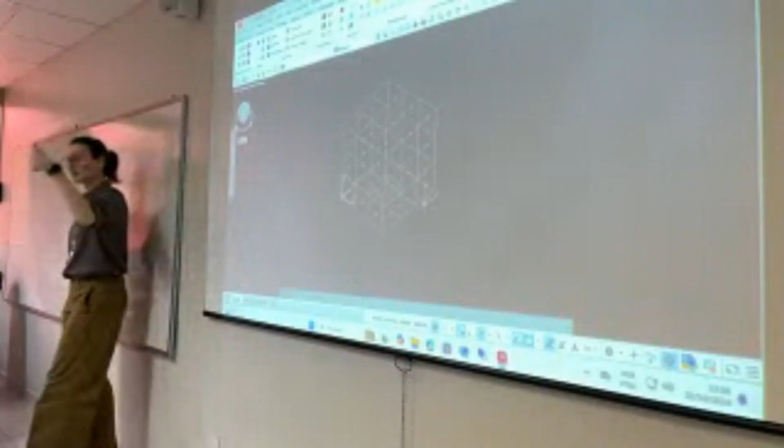Everybody ready? Okay. So we're going to be starting now the workshop or tutorial about thermal analysis with Thermal Desktop from ANSYS today, okay?

Just to present myself real quick, my name is Talita. I'm a professor at Federal University of Santa Catarina, in Santa Catarina, a little far from here. And I work in this area of thermal analysis for different applications, oil and gas, petroleum, and industrial equipment, and

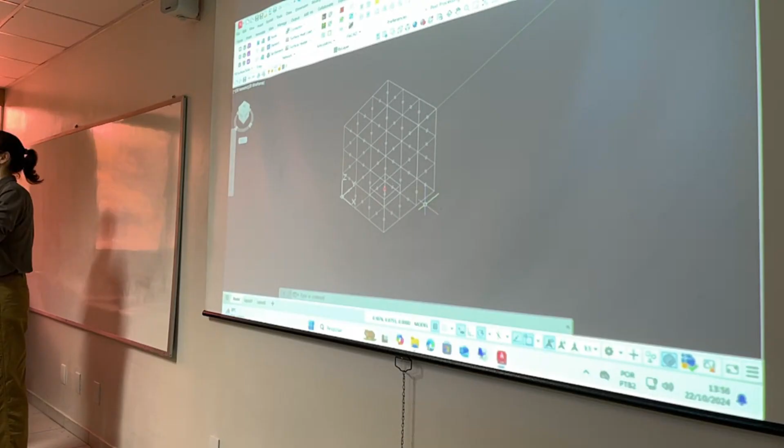satellites. So today, I'm going to be presenting a little how the Thermal Desktop software works for space applications, okay? That's the idea. Please feel free to ask questions at any time, okay? This is the interface of Thermal Desktop. I'm just gonna be showing you a little what we are going to be looking at at the end of this tutorial, and then we are going to be starting from the beginning, okay?

This software, I don't know if you are aware, Thermal Desktop is the software that nowadays ESA and NASA use, okay? As far as I'm aware, it's one of the most used softwares for space applications. So it's a very good software. In Brazil now, they have a commercial representative. In Portuguese, we say E3S. In English, it would be ESSS, the seller of the software.

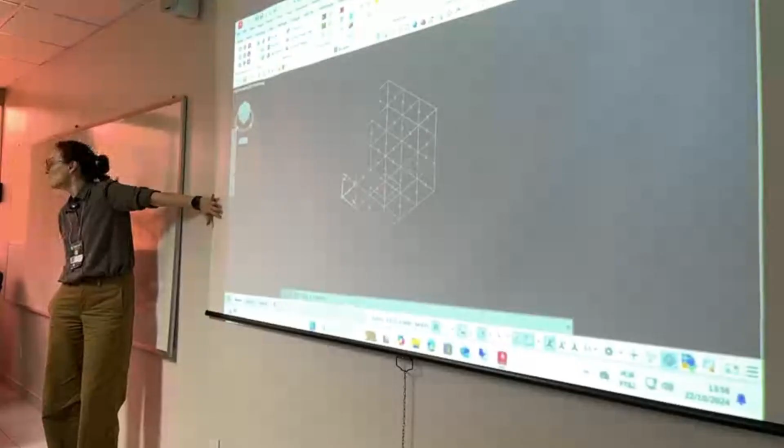They sell also all models from ANSYS, okay, CFD, mechanical, all these models. STK for orbital analysis, they are the seller, okay? And now they sell this one. We have bought this Thermal Desktop license for our lab in Santa Catarina. Nowadays, my students are learning to use it, and I actually like it very much. That's why I decided to have a little tutorial about it.

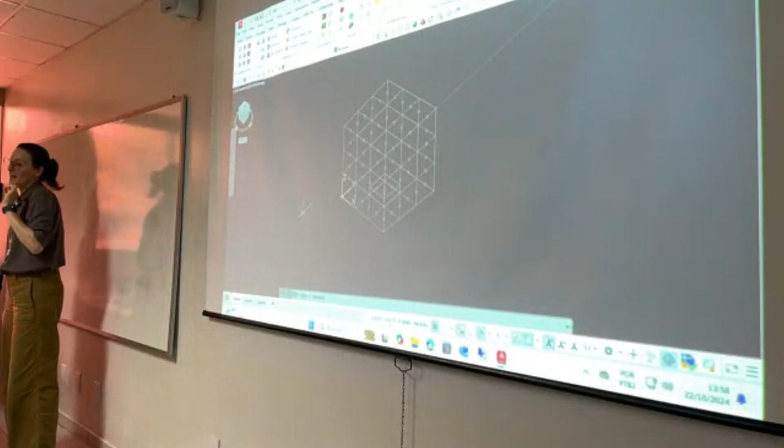It's very good, but it's a little complicated. It's not as user-friendly as ANSYS usually. Okay, that's the idea. So what I have here, just to have an idea, it's a very simple example. Since we only have 1 hour and a half, we're gonna be applying it to a simple 1U CubeSat in orbit. It's one of the most basic applications, okay?

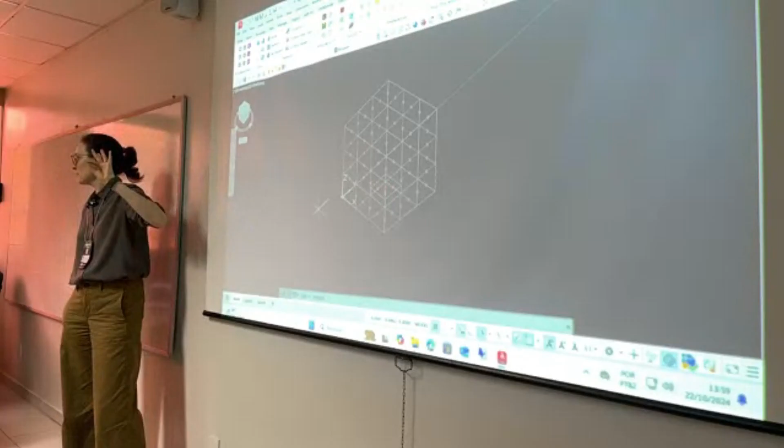You can do a lot more. They use it for the International Space Station, okay? You can do a lot of things, but this is a basic example that covers all the basics you need to know to make it work. So what you can see here, it's a 1U CubeSat, 10 centimeters by 10 centimeters by 10 centimeters, something like this, okay?

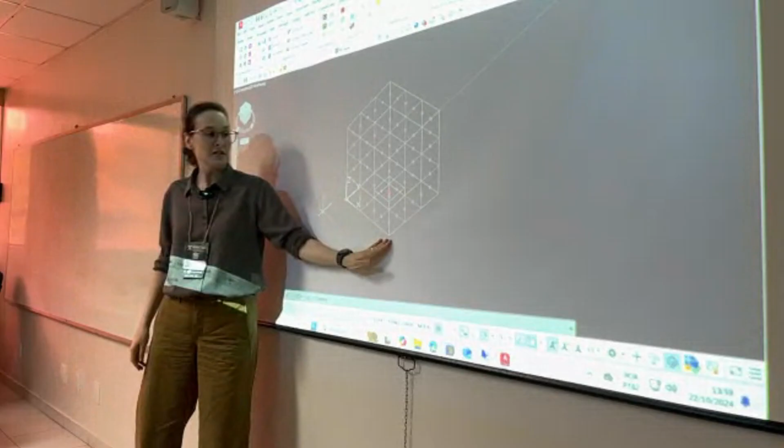Very simple. It has a little battery inside. You can see here a little cube. Let me change the wireframe. Here we are seeing the wireframe. Here is the 3D model. And just so you can see inside, let me just... sorry.

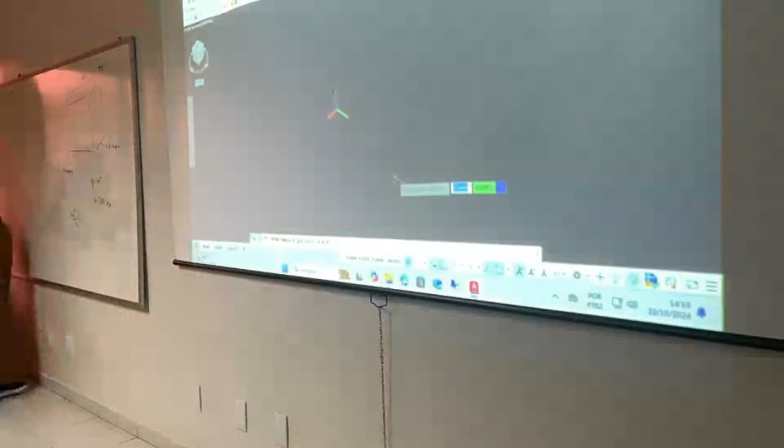So the thermal model, you can see what you can actually do. I'm going to do a little rectangle. You can see AutoCAD works with coordinates. So if you are more than 40 years old, you know how to do this. But if you are younger, you are more familiar with SolidWorks. That's a little different. But here you can see the coordinates. So you actually put 0, 0, 0, 0, 1, something. You can do it like that. But they do have something for newer generations where you can click for the origin. So I'm going to say the origin is 0, 0.

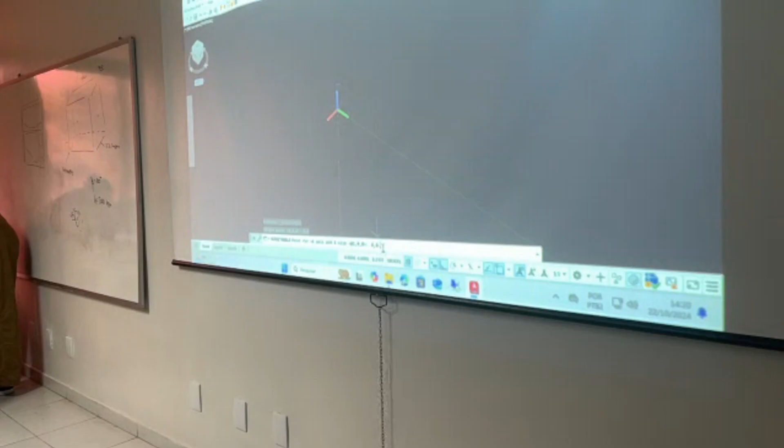Then it says, okay, your first point. If you put 0, 0 here, it understands you're going to be starting at 0, 0, 0. And then you can put points, each point, or just try to draw. I'm going to be doing the first point. So if I want a CubeSat 1U, it would be 0 for X and 0.1 for Y. So here it says, okay, you are telling me 0, 0.1, and 0 in X. And here you can draw. If I just click on the screen, it's going to close the rectangle for me. I'm going to close here.

And each time you draw something, he opens this panel for the surface. So here, he's saying to me, okay, you have a rectangle. In the X direction, you have one node. In the Y direction, you have one node, 1 per 1. This configuration here, one simple node. And you have X and Y. I'm going to be starting with this one because we can actually just update after, okay?

But if I put here 3 and 3, it's going to be 9 nodes, 3 per 3, and so on, okay? So this is 1 by 1. And now you have a lot of configurations here. Numbering. You do have to actually remember to use numbers for each node you create. So if you do not use different IDs, the software is not going to be doing it for you. Like I said, it's not a user-friendly software, okay?

You have to actually remember, I'm creating 3 nodes. I have to tell him which one is 1, which one is 2, which one is 3, okay? So this one for me is the 1, the first node. The submodel, you have to tell him, okay, what's the name? This is in what submodel. I'm going to be using only one model here because it's a submodel called solar panel. And then I would go here, say solar panel. I'm just going to be using one here.

But here I have my one face, the first one. You can see a little node because I said it's one node. Thermal Desktop is finite difference based, so it uses nodes for configurations, okay? Now I'm just gonna create the others.

Yes. You mentioned radiation for thermal. Does it include also conduction? Yes, it is there, but I didn't change it. Good question. If I double click, he's going to be opening the same tab for this surface, okay? You do have a tab for conduction configuration. I didn't change it yet because I didn't create the material. I'm going to be creating it, and then I go back here and say, okay, this is the material. But you're right, because what is finite difference?

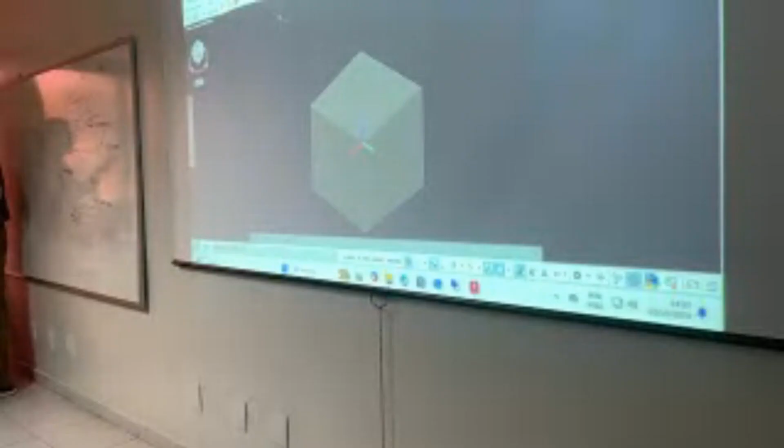Here you have the 6 faces, each one with one node. This is the geometry, only the geometry. Okay. Now, what I should do is tell the software which material this is. Is it aluminum, is it a solar panel, what is it? So you go to thermal, again, you see only the thermal tab. And I go to thermal physical properties, edit property.

If you do that, this panel is going to open, and we already have some materials because I already did this workshop, this tutorial at home to see if it was going to work. So you come here and you actually input your material. Which material do you want to work with? So if I want to do something like a test, just a test, you put the name, you do add, and it's going to ask you to give it the properties of the

materials. K is conductivity, for the conductance, okay? This is normal thermal conduction. Watts per meter per Kelvin. If you have iron, that's a metal, you're going to have a high conductance because it conducts heat through the iron. If you have something like insulation, it's going to have a small value, 0.1. So this is actually the value that you have in most handbooks for space applications for each material. Okay, this is very easy to find.

This is just the default, it's 1. Okay, we're going to be using the ones I have here. You can tell if it's isotropic or anisotropic, for guys from material engineering. If you have composite materials, you have anisotropy and so on. Usually in space applications it's isotropic. It's the same value in each direction. That's actually what we have.

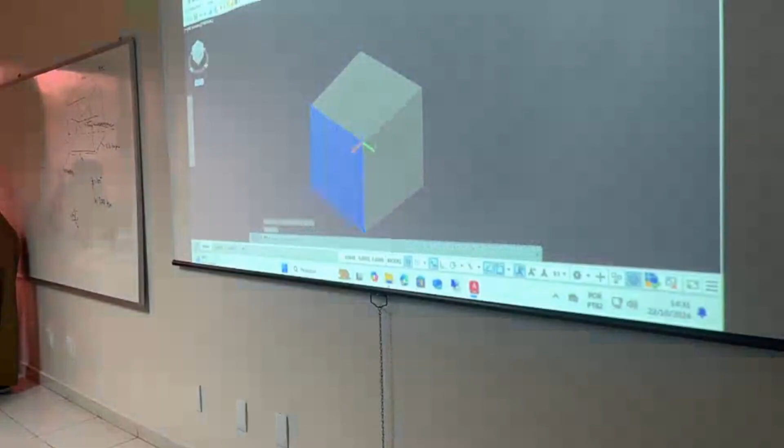And then I go back to my geometry and I say, okay, this surface is this material. Then I just do okay. Now it understands. I didn't use that. And here, okay. This is using a submodel that I created and called solar. You could use the same submodel. You can see here that I put this is aluminum. You can choose whatever. This surface is aluminum, okay? And I say the thickness is 0.02 meters. This surface is set. I can use different configurations. This is just an example.

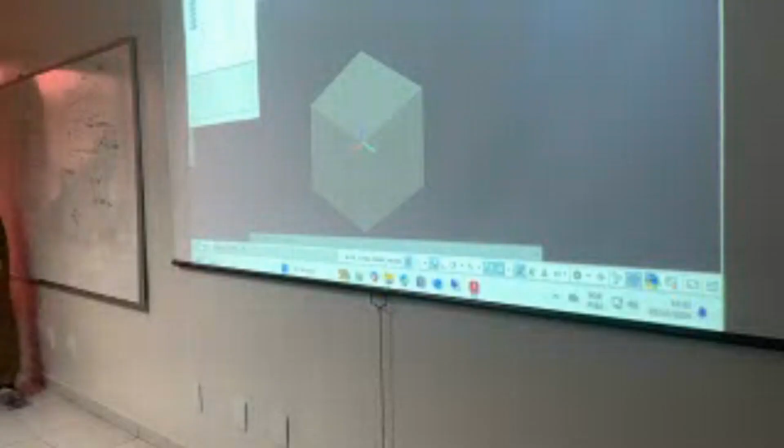So this is the conduction. You do that for every one. If you do not want to do one by one, you have this model tree. After you are familiar with the software, we use this model tree. It indicates everything that I've done. In the last example, the name was main. This I just called solar. You have 1, 2, 3, 4, 5, 6 nodes, one for each face. It's just a geometry tree. I can do everything from here also. If I want to change all nodes together, I just go here, edit, and it asks, are you changing the surface or the node?

I'm changing the surface. That panel that just opened is the surface panel. So I go here and I say, okay, change. Are you changing the 6 surfaces? Maybe the resolution is not so good, but there's a 6 here. Are you trying to edit all 6 surfaces all together?

Yes. If you go here, you're going to the same panel. But if I modify here, it's actually modifying all 6 configurations. When you are more familiar with the software, you usually do a lot of bundles like this. Okay. This is the conductance. So right now, the software understands that I have 6 surfaces and they are all aluminum. Okay.

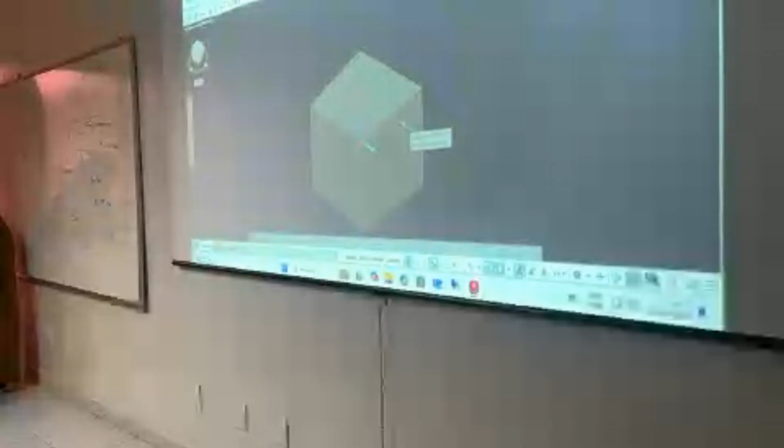The strong feature of this software is the radiation. So let's go for it, where if you don't know how to set it, it's going to lead to errors. So just to explain radiation. This is a very simple design. So we have radiation heat transfer, which, if you are not aware, is one of the three phenomena of heat transfer.

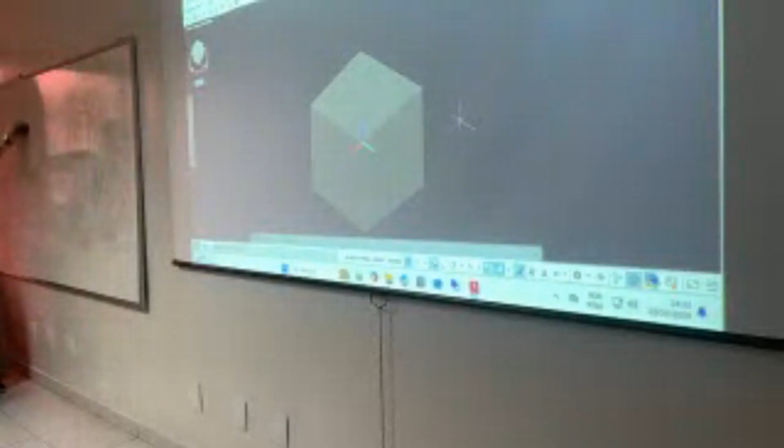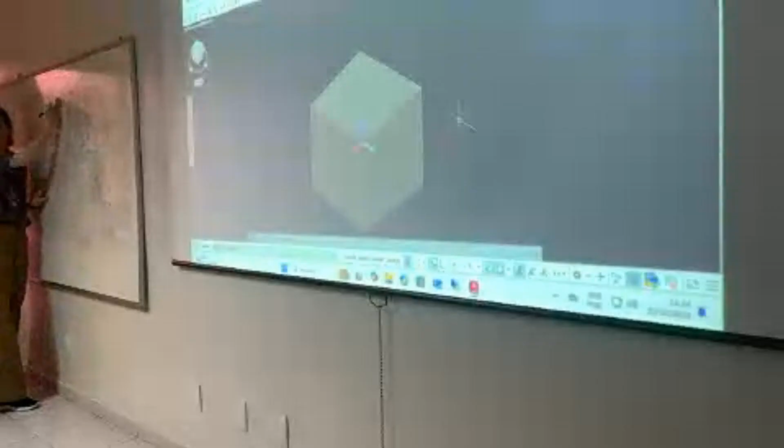We have conduction, solid by solid. We have convection, solid by fluid. And we have radiation, surface through surface, by space. That's the idea. So radiation: if I have a surface here, and I have a surface here, if there's nothing blocking it, this one is going to be exchanging radiation with everything it sees. So this surface and this surface exchange radiation. This is what we call view factor and so on.

This software has a model of view factors, okay? So when I draw the geometry, it's going to calculate this for me, so I do not have to calculate. It uses a Monte Carlo model. It's a statistical model. So what it does is, I've drawn this surface and this surface. The software understands that this surface has this geometry, and then it's going to be shooting a lot of rays.

So it traces the ray, and it understands, okay, if I have 5 rays coming from this surface, and one of them reaches here, the view factor is going to be 1 divided by 5. If you shoot 1 million rays, you're going to have a lot more rays that actually collide with the other surface, and it calculates. The higher the number of rays, the better the result you have for radiation. That's the idea. All of this the software does for you. You do not have to worry, okay?

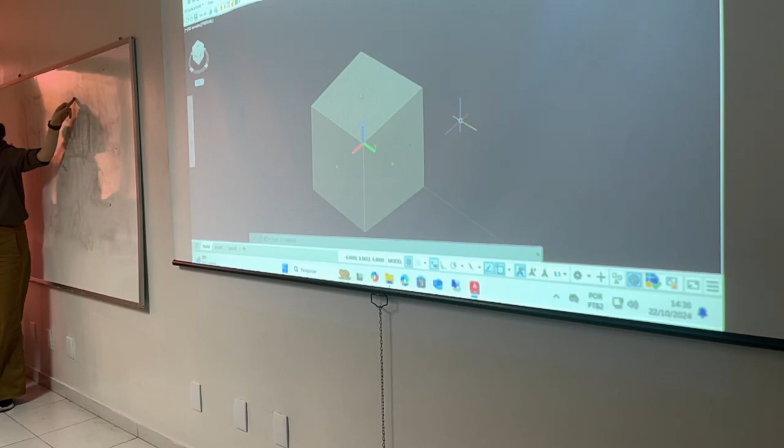What you have to worry about: I have to actually tell the software that this surface and this surface have a clear path for radiation. It's not blocked. The user has to say it. If I just draw this and say go, it's not going to go. Because I have to say this one and this one exchange. How much? I don't know, you calculate. But they do exchange. That's what we call radiation analysis groups. And the user has to manually set it. So you have to understand a little of radiation for this to work, okay?

For us, what would we actually have to set up for space applications? Our application is an easy radiation application because you have a cube, a closed cube. So I'm going to be drawing a 2D of the cube. So we have the internal face, and we have the external. This is a classic problem, I only have 2 possibilities for the radiation. It's going to be exchanging inside or outside.

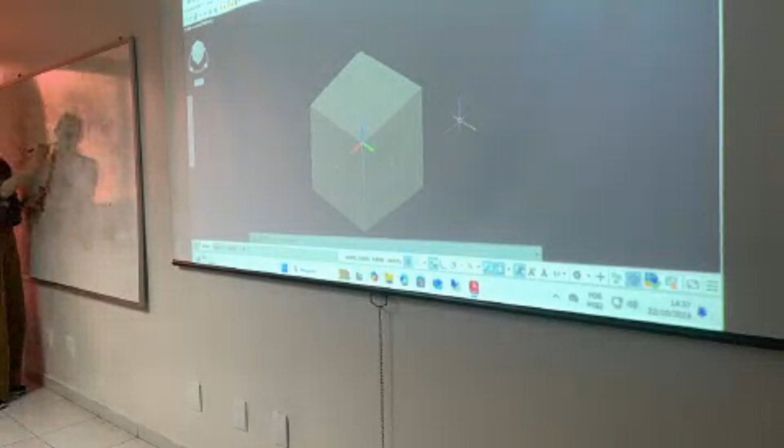That's the only possibility. Because this is a surface, but the internal side of the surface is going to be shooting rays here, here, here, here. But the rays are not going to be going outside because there is no hole. There's not a cavity, okay? There's no opening. The other side is going to be shooting to space. So we have the external radiation, and we have the internal. And I have to tell it. That's the idea, okay? If you do not do that, it's going to create an error, and it's not going to go on.

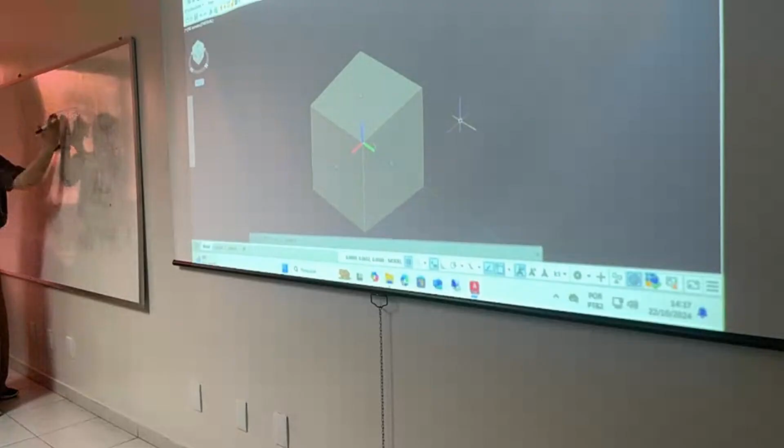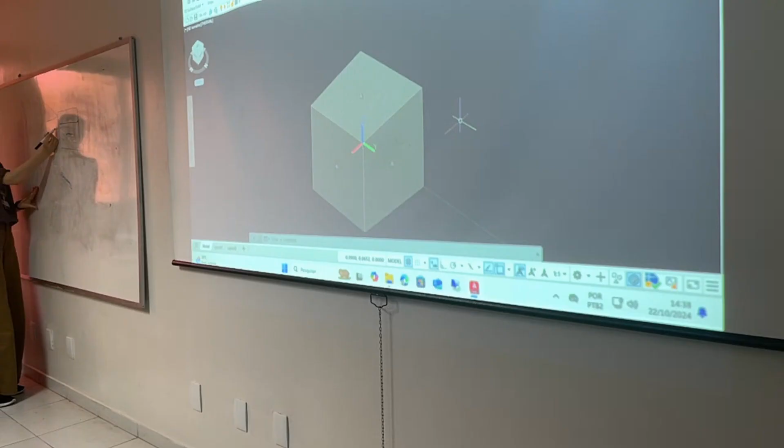This is actually what I consider the most common part where the user usually makes a mistake. It's very easy if you can see this. This one is going to exchange with this, with this, with this. It's internal. No rays are going to be coming out because the radiation, when it comes from this and collides with this, is like light. If you point a laser at the wall, it's not going through the wall. It's going to stop on the wall. That's the radiation, okay? And this side is going to be emitting radiation outside.

That's the idea. So we create in this problem 2 radiation analysis groups, the internal and the external. And I tell it which one is which, okay? So that's what we do when I go to thermal. And we have here, radiation analysis group. When I click here, I have to tell it, okay, we have 2 radiation groups, internal and external.

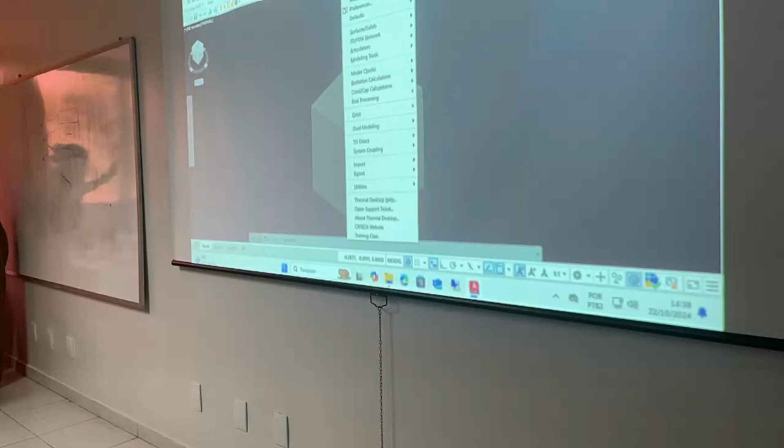This is the radiation analysis group. You can see there's already an external and internal here in Portuguese, because I did it, okay? Usually the default is external and internal, since most applications are space applications, the default software is to have what he calls external and internal. You can just edit it, okay? I erased it and created the external and internal.

Look, this tab is just for the name. I'm just saying there's two radiation groups, the external and the internal, just that, okay? I didn't say which one is which one, but this problem has only two radiation groups, okay? This is just comments. Radiation from faces to the space environment, radiation's internal. It's just that, just for curiosity.

If you have a refrigerator, freezer and the one, okay? If this is your refrigerator, you have here one radiation group, because this one's going to be exchanging like this. We have two, and you have three. So each problem you have to analyze how many radiation groups I have. How many cavities do I have? You have one cavity, two cavities, and the big one, three cavities. Okay, so each problem you have to analyze.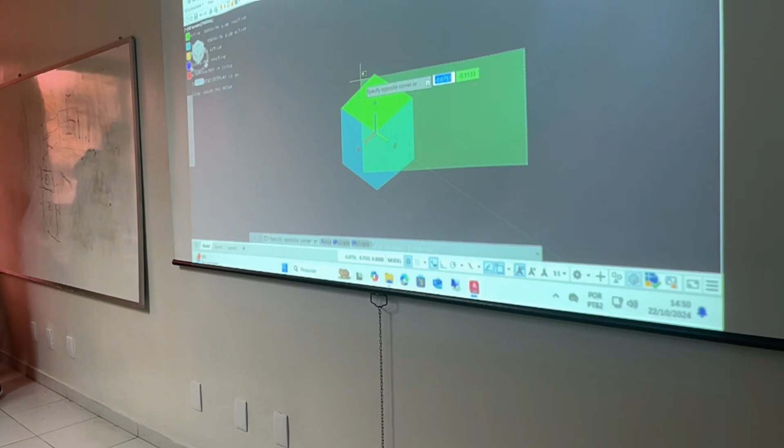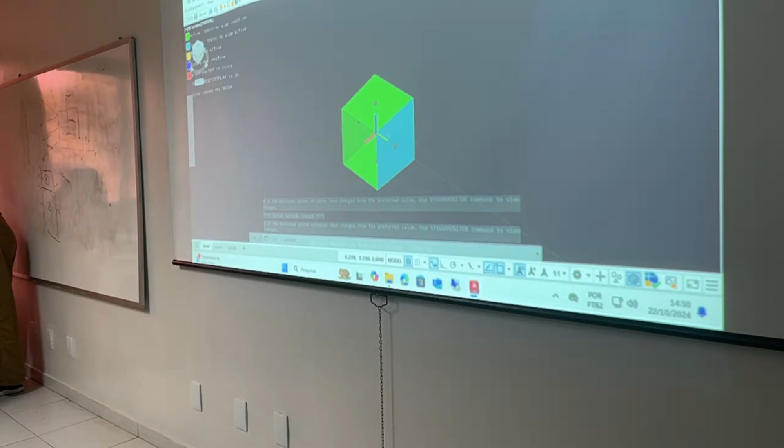Just for curiosity, if you want to see inside the satellite, you just click one of them. Go here to the model browser, the tree. Let me see which node is this one. You go to the tree and you say turn visibility off. Inside it should be green, because I'm looking at the internal, and you can see almost every one is green except the top one. So this is how I check.

Reset, I'm just going to be resetting the faces. My cube is there. And this face, I'm just changing. So I go to radiation, and external is actually top, and internal is actually bottom. That's it. If I do model check again, active display, for external, they will all be green. And everything is green. So that's how we do it. They are all green. You can see it.

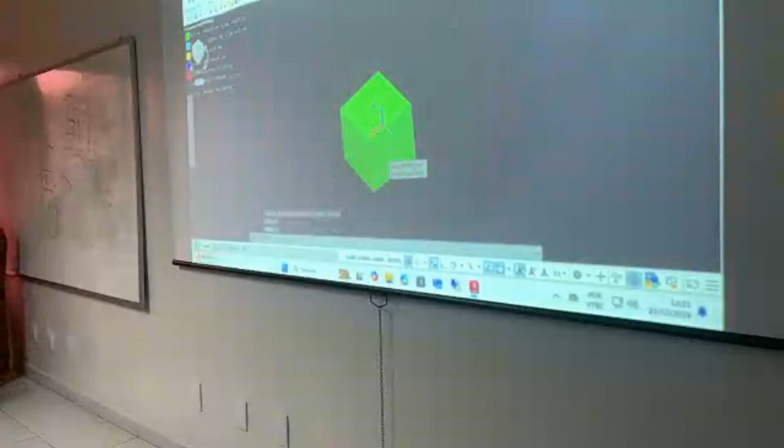Then I know everything's okay. Actually, you should check it for the outside and inside. So if I take out one of the faces, they should be all blue inside. But I know they are because at the time they were. If this is set right, you're probably going to have a good result.

Now the only thing missing is the orbit and actually the optical properties. When we did properties, it was conductivity properties, but I have to actually tell it the emissivity of each surface. So you go to optical properties and edit it. And here you can input any material. So it's also a little tab. It has some that I already prepared for the tutorial. And you have the solar absorptivity, the infrared emissivity, and the ratio between each one of them.

If you are a little familiar with radiation, radiation works in spectrum. So the radiation properties are not the same for the solar spectrum and for the infrared spectrum. Usually you have different configurations, okay? If you do not know which one to input, go to CubeSat or spacecraft handbooks and they have the radiation properties, okay? So here, I'm just going to be editing one.

So solar panel materials, these are properties from usual solar panel configurations. So you have here a panel for radiation properties for solar and infrared. Just to be clear, these are the ones we use for space applications, okay? If you have a spectrum of radiation, usually we use micrometers or nanometers, okay? For the wavelength. Radiation is waves, electromagnetic waves.

You have top solar panel. The correct one should have something else on the bottom. The inside of the satellite is not solar panel. It's something else, okay? So you should have a white paint or aluminum or something else. But this is a simple example. It's not going to make much difference. I do that to each face. Now I have correctly told the software.

The only thing missing is the orbit. Now we are going to put it in orbit, okay? Until here, the software understands what it has to do for heat exchange. Now we just go to orbit. You go to thermal, and you have a label here, orbit. Thermal Desktop already has orbit radiation calculations for classic orbits for you, okay? So you can actually just say, I want this orbit. This is why the software is used for space applications. It's already prescribed. So you go to orbit, and you have a lot of things here.

I'm going to manage orbits. Manage orbits is, I'm going to say to it, you're going to be doing an orbit. Usually it already has a basic one. It says, okay, you want an orbit? I'm going to call it orbit. It's a basic one, I'm just going to be using one. So I go there, edit. I'm telling it, okay, it's an orbit, but you should have the configuration I want. You can see this is a default configuration.

I don't know if you can see right, but this is 0 degrees beta angle. This is the angle of the satellite with the sun. Okay? Beta angle and altitude. This is 430. This is the International Space Station, almost. Okay, this is altitude. So here you can set any orbit that you want. For this application, like I said, I'm going to be setting a simple one. It's what you call a 30 degrees.

So you have the Earth, the equator, and I'm going to be using something like 30 here. And here we have the sun. And I'm going to be setting 500 kilometers. It's a normal orbit, okay? Altitude in space.

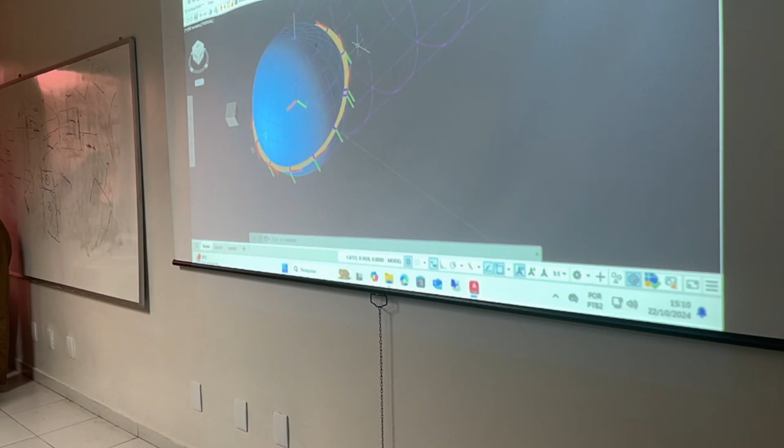In here, you could set spin if you want. I'm not going to be setting spin, okay? And you can add a comment. So I just input a basic orbit of 30 degrees. And now I can display it, and he's showing me what I have inputted. I'm going to be zooming in. You have the Earth. You have a representation of the satellite. This is actually not in real scale because the satellite is very small.

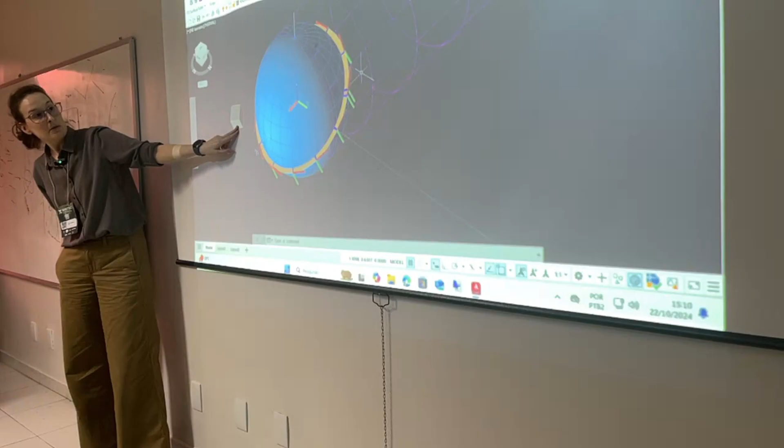But you can see he's telling me, this is the satellite, this is Earth, okay? And this is the shade of the Earth. So the sun is here. And you can actually check if this is the orbit you were looking for. This is the start point, but I can make it an animated orbit just to check if this is the one I'm trying to see. So here, I go to animate.

And yes, you always have the same face looking to the Earth, and he's rotating at 30 degrees. If I look from the side, you can see the 30 degrees. This is the configuration. The sun is coming here. So this is the 30 that I've inputted, which is what I wanted him to do. The face is always looking at the Earth. That's the orbit I'm inputting.

If you input something else, you can check here what he's supposed to do. Now everything's right, okay? This is just a visualization. So I go reset, just go back to my model. And now we are going to set it to go. Everything is ready. I just have to go here and say, okay, let's solve this.

You can create different cases, because with this software you can create and compare different cases of orbit, okay? I'm just going to be running one case, so I call it case orbiter. And I'm going to be editing what I want to calculate. So go to edit. We have a lot of things here, most of them default. He's asking me, do you want to calculate radiation? Where am I going to be writing this information, and so on. This is all default, okay?

Here I'm telling it whether this is steady state or transient. Transient varies with time, usually what we are looking for to see the orbit. But this is checked, so we have a steady state. Let's say it like this, the software is just a calculation. So if I just say transient starting at 0 and go to any time, he's going to be starting at a default temperature of 293 Kelvin.

And then he goes up, and it takes a few orbits to stabilize to the actual behavior in orbit. If I preset a steady state, it starts from the same temperature, but it runs a few orbits, and then shows me the results after the orbits have a periodic behavior. And then he goes to my transient. This is what I'm setting, because you can actually see after the launch a few orbits.

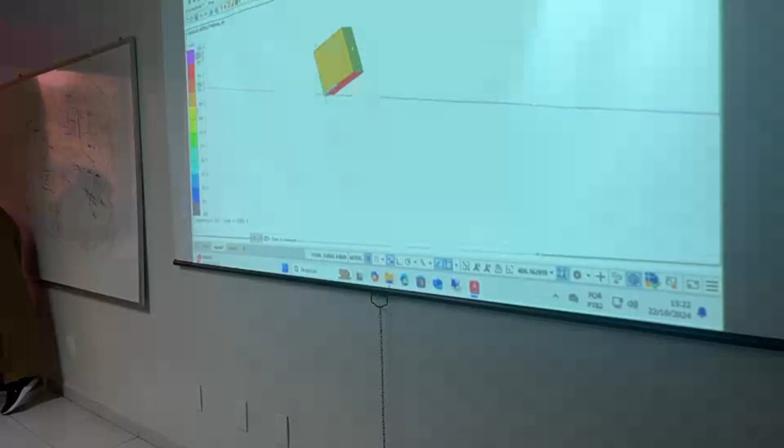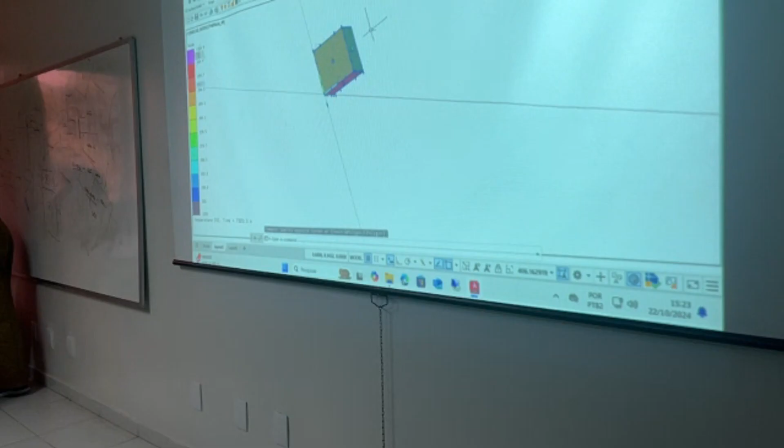Here's the color code for this configuration. We have the configuration here for the temperature at time 7,000. It's a transient, so this time is a picture. Usually we are interested in the orbit configuration, so I actually go and just mark all 6 faces. And this is my maximum and minimum temperature for 3 orbits for this case. You can see here it's indicating each one. Remember, I called the nodes 1, 2, 3, 4, 5, 6. It's each one of them.

This is the time. So you have the 17,000, 3 orbits. You can see the 3 orbits here. Here it starts in the middle of the orbit. You finish here inside. So you have 1, 2, 3 orbits. And you can see each panel's temperature.

And you can see here one of the panels is lower. This is the nadir, the one that I said always looks at the Earth. When you look at the Earth, you usually don't get much sun, so you don't get so hot. And these other ones are the ones that actually see a lot more sun, and usually this is what you're looking for. And from here, you actually analyze the behavior. This is a simple case for one node.

I'm going to be showing you now if I input a battery and more nodes. We are not going to be doing it step by step because we do not have time. The step by step is until here. If you do all the steps and understand this configuration, you can actually do any model. This is a very basic one, but just to show what the software can do, a more complex configuration is the one that I opened first.

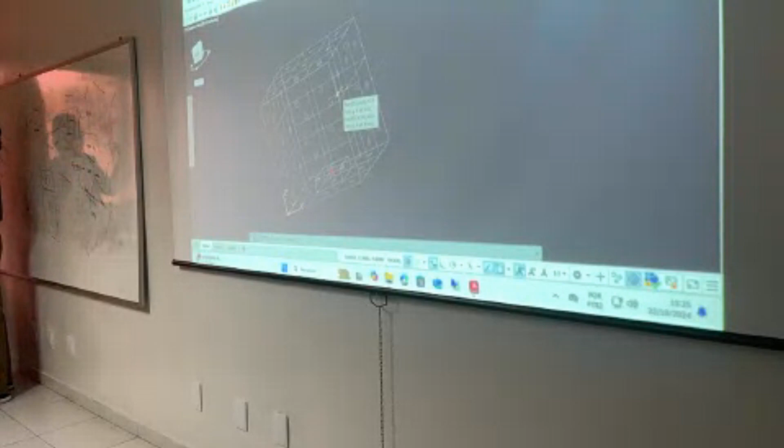Here, this satellite is not spinning. If you input spinning, usually you will have a more uniform temperature. When you do not have spinning, usually you have a higher temperature and lower temperature.

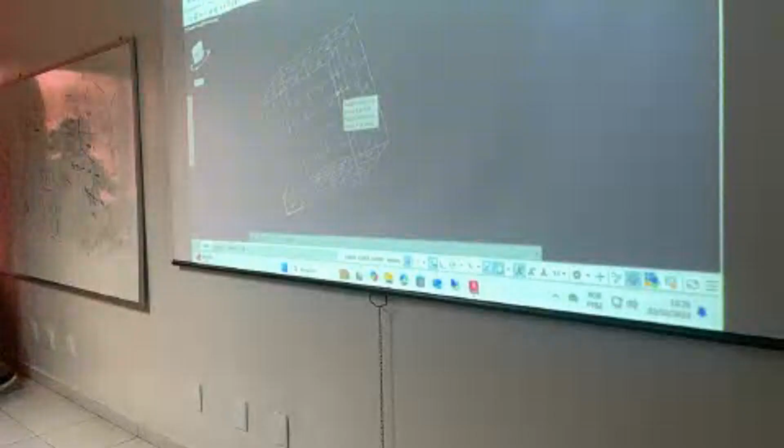But actually, this software is used for complex applications, so you can go crazy. You just have to know what you have to prescribe. You have to have this information before, okay? This is a configuration with more nodes, so it's still one U, but you have 9 nodes in each face, just to show you that the battery has a constant heat flux. I'm considering the battery is always on, okay?

So actually you have an input from the battery, and when I run this configuration, it goes like this. You can see that even with more nodes, the picture is not uniform, but each face is almost the same because the satellite goes slowly. So it's not so transient. And now if I go and plot the temperatures, you can do a lot more plots, okay? This is the very first plot.

You can see everyone. So you have the maximum for each one of them. Here you have the solar panels and you have the battery radiator, okay? Also 3 orbits, so you have 1, 2, 3, and that's the beginning of the other orbit, but you have different configurations of temperature. I could actually choose just a few panels.

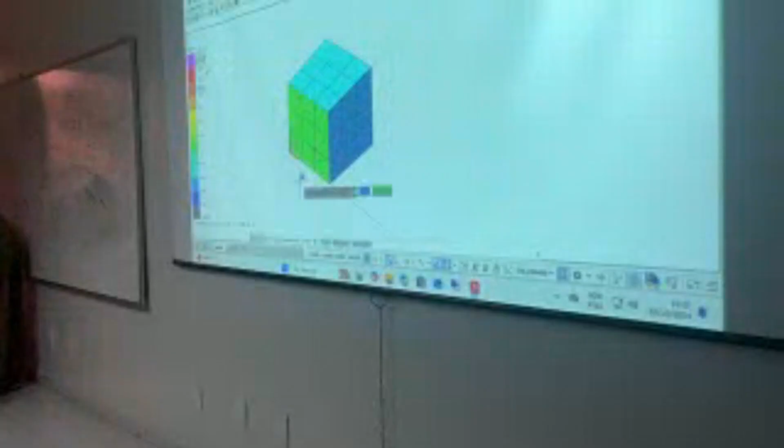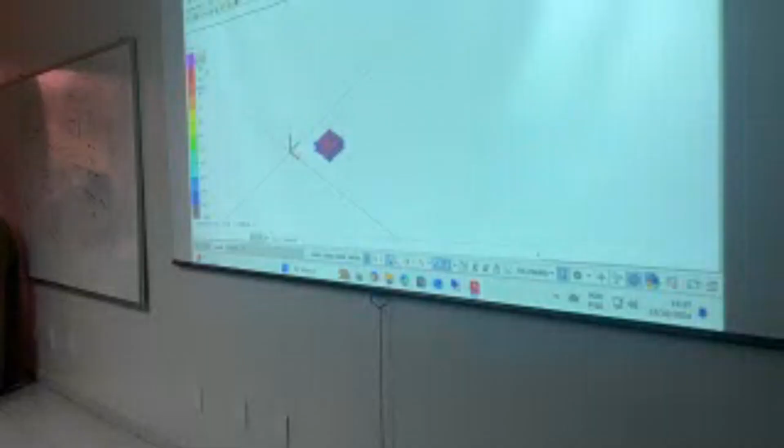I'm just going to be showing the battery. You can see this is the battery. It's a simple battery with 1 node, and it's in the lower part of the satellite. And this is the temperature of the battery. So this is a battery that's always on. You can prescribe an on-off behavior and analyze it, and see if the temperature is too low or too high, to check whether the components are within the temperature limits. So you can do a lot of configurations.

Okay, the important step, just to finish, is the radiation calculation. You have to understand a little radiation to input the configuration of the radiation analysis correctly. Otherwise, it's not going to work. And what I said about the radiation: if you forget to set one of the radiations, here are the radiation tasks, I'm just going to take off the emission. This is usually one of the common mistakes.

Processor failed. If you get anything wrong, it fails. And this is the crash. It's very hard to understand what you did wrong. So follow each step in the same order so this doesn't happen, because we have very little material about this software online. It's very closed. It's very hard to find material.